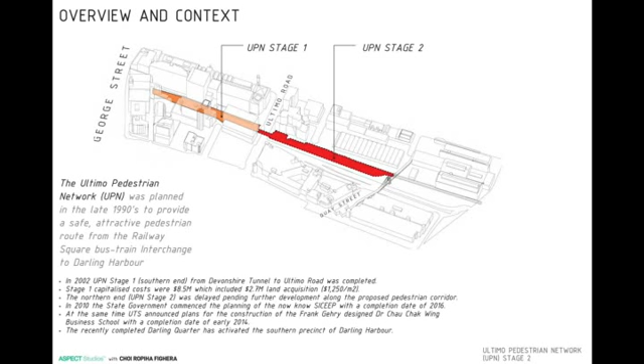It talks about what the UPN, the site we're dealing with, is actually called - that's UPN Stage 2 on that diagram. This 500 metre long by roughly 20 metre wide site should be considered in its totality, but in terms of our brief, in terms of aspect, we are looking at the darker red UPN Stage 2 in there.

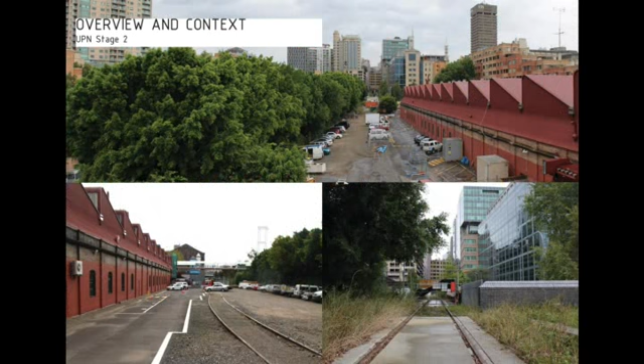The site as it is, you know that, I guess we can flick through. This is Stage 1 we're looking at here. And Stage 2, which is really the focus of our commission.

But of course it has to be a pedestrian and cycle network coming through there, connecting ideally central all the way through to Darling Harbour in an intuitive, easy way to move through. It has to be a destination with a series of events or experiences along its length. Sustainability is critical, with opportunities for educational and recreational interaction with cultures like this.

SIT and UTS are key stakeholders in this, along with the powerhouse. So what's SIT - sorry, the TAFE. So combined, your population day to day has been given to us at about 80,000. So that's a big catchment of people right on the doorstep of the UPN.

Other things there - obviously safe and friendly, and there's some commercial element to it. Our brief talked about the opportunity for a small retail opportunity on the UPN, more like the project that was just presented to you, the greenhouse. Accessibility is fundamental - this has to be DDA compliant. And innovation, of course, and history, and the way we interpret that has to underpin what we do.

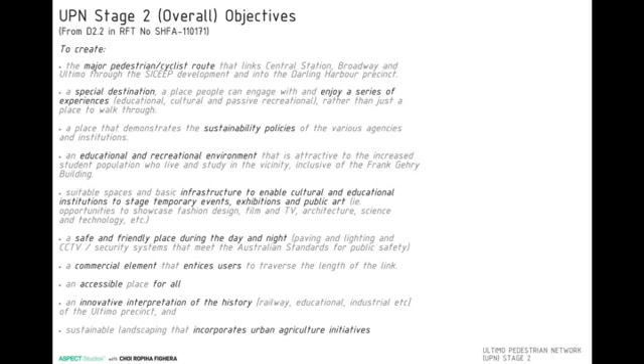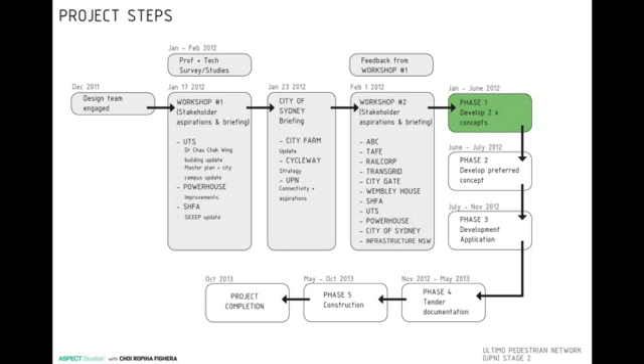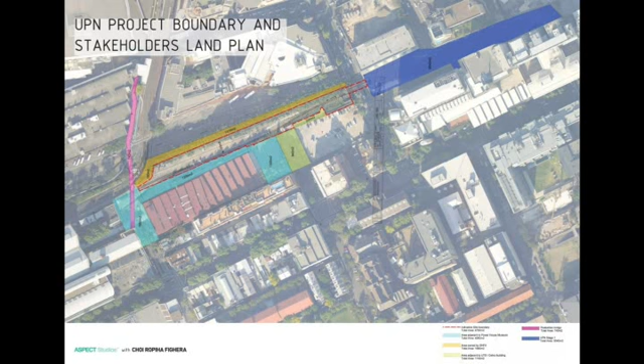So the site, this puts it in context a little bit more. You've got the model out there and should know it pretty well by now, but SICEEP, the big 20-hectare site you've just been hearing about, is a fundamental urban renewal project for the city, but also for our site. It's the northern termination of the UPN as it is at the moment. The other key buildings are the Powerhouse and the Harwood building, where 97% of its exhibition content is in the basement of that building.

Only 3% of that is ever shown at one time. The Chau Chak Wing building will fundamentally bring the eyes of the world to this part, in a way we hope this will do too, but this one's already in train. There's new development planned on top of the Transgrid building, commercial buildings, some retail down the bottom, Citygate Hotel, some ideas, and obviously these should be explored thoroughly about how that could interact on the ground plane to the UPN. And of course UTS buildings, SIT, TAFE owns this building down through here, Wembley House, ABC. So it's an incredibly potent mix.

I'll just add a few more things. If you look at this, one of the quite telling things is the intensity of cultural, education and technology institutions that face onto UPN. It's quite rare for a city to have all of these institutions essentially share a public realm, potentially share a public realm. The other interesting thing is unlike, let's say, the High Line or a lot of other rail corridors, where there might be a lot more mix between residential and general office, there's actually quite a dominance of institutions that have a relationship to UPN directly.

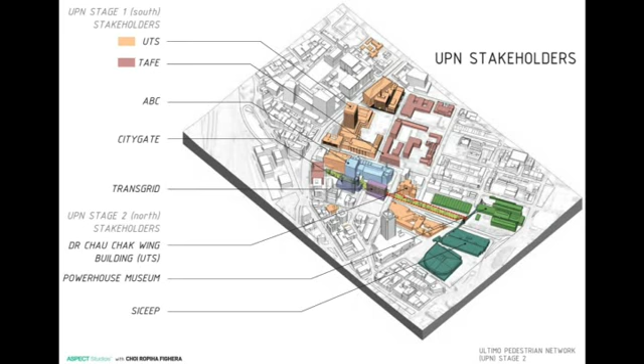That's why the studio is really exciting for us. One of the things that when we started on the project wasn't so much, well, let's make a beautiful doormat for Gehry's building, was really this more broader regional role that this corridor can have, and that's the exciting thing about this studio.

So how are we approaching it? I think the next 10 or so slides talk about our key principles that we established in order to get into the site and try to understand how we might approach it.

The first one, like any first approach to an urban design brief, is connectivity. In particular, this one's been set up in brief to us about connecting A to B, and we think there's a greater potential for multiple connections to be made across this site.

The primary one is north-south, which comes from the Devonshire Tunnel down to Darling Harbour, but there's a whole range of more interesting, and even more valuable connections east-west, such as the movement from this campus and UTS back down into Chinatown and back down into Darling Harbour.

And it's no coincidence then that all of these cultural institutions line Harris Street, being one of these great ridge streets. But what happens then is the topography falls away dramatically down into the valley floor, which is Darling Harbour, and then shoots out into the harbour itself.

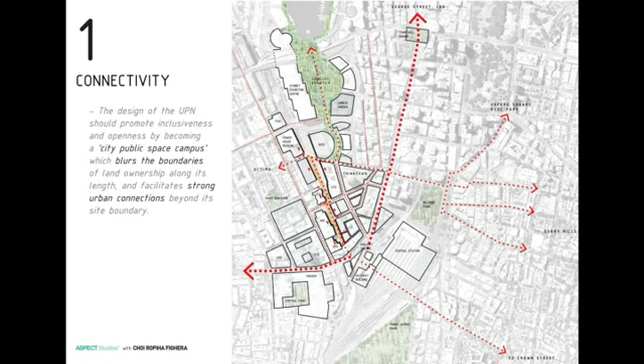Okay, so one of the first things we wanted to explore here was what is the history of the site, and how can we leverage that and create a narrative, if you like, or a story for everything that we're doing on the site.

And that's really recognising the industrial history of the site, its development from rail and wheat and wealth to city making, essentially, to something which is now about innovation and ideas. And again, the institutions which sit along the edge of this spine are those which deal with a knowledge economy rather than a former industrial economy, which was about city building and steel.

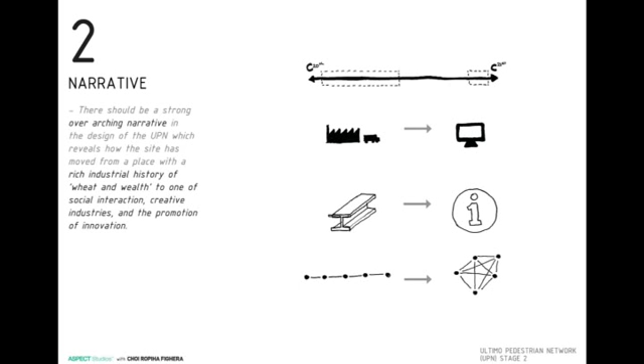So if we go to the next slide. And our opportunity, and the thing that we find interesting here, is how do we interpret that change in what we do on the ground, in this figure, in this site.

You jump in if you want to. Yeah, I'll just say a little bit more about that. When we started to talk to all the different stakeholders, what was interesting was that all the key institutions, such as UTS and Powerhouse, all have a background from their era of industrial economy. And they've all made a transition into the knowledge and creative economy. And even TAFE were very keen to tell us they don't just do trade apprenticeships anymore.

We do fashion design, graphic design, digital fabrication - we're very much part of the new economy. The corridor has had a really strong infrastructural role in our economy and culture in the past, and it still does, but it's really already evolved from that industrial role to a new kind of social and creative role.

So while the rail is of great interest to us as a story of its past, and it's still meaningful, we're really seeing the opportunity for social infrastructure to be the most dominant thing on the corridor.

What that means is, for us, it's critically important that this thing reads - what the UPN becomes is a figure in its own right. So an identity is a ground-plane intervention. It's not just about the soft programming that sits on top, but also about the architecture and design of this thing.

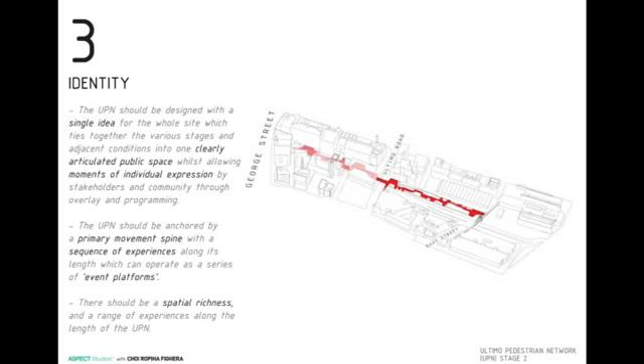Movement - this diagram just says there's a lot of back doors on the UPN right now. Our principal opportunity here is to turn those into front doors. The Chau Chak Wing building will be one of those.

It has two entrances - one on Mary Ann Street, probably the primary address for the building. But in terms of daily movement patterns, it's this high-level connection across the Heritage Bridge that will get the most movement, given its ease of access from the rest of the campus down through this building onto the UPN. There's only one connection really well used at the moment, the ABC, which you guys probably use maybe daily - that's a great hybrid connection, essentially just one little door providing the main conduit on ground to Harris Street.

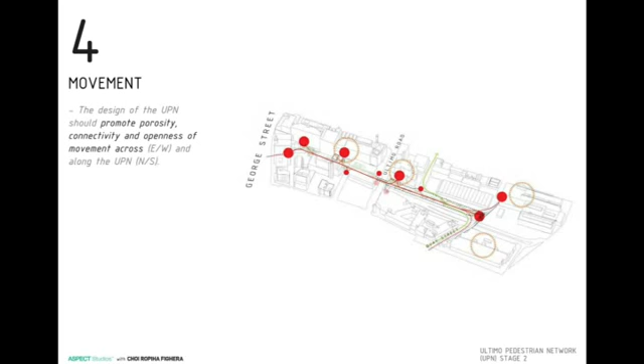Event platforms - as mentioned, that's a key part of the project. It was really interesting hearing the SHFA presentation before. The institutions we had communication with - the replicating story amongst all of them is they want to break out of their silos and engage, collaborate with other institutions, and engage with the city in a public way if possible.

So we really saw the UPN as a great platform to have those sort of interactions take place. We've established in our thinking that it's essentially not only a movement path, but an opportunity for various different kinds of social engagement to occur along its length.

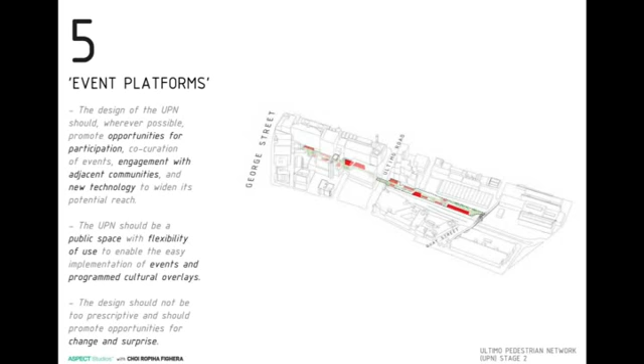So these are some overlay things that could happen on those activities, on the platform things. And interpretation is fundamental to the concept, not a tack-on idea. As we explained, the basis of the whole drive and design is trying to tell that narrative of transformation, but still retaining a kind of infrastructure role. It's just the kind of infrastructure that's evolved.

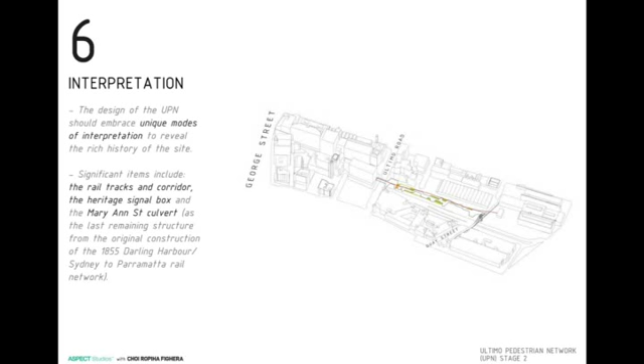And secondly, as Sash said, that's told by the new figure that overlays onto it. So even as we conceive how that might work on UPN stage 1, where you have the asphalt etc, we almost conceive you could break up that asphalt, leave it as it is, let some of the ecology rehabitate into that, and then these new social infrastructure overlay on that.

So there are some traditional interpretive things we see there's opportunity for. There's retention of as much of the original heritage fabric as possible, including the rail lines. There's a culvert there, a heritage signal box, and other items along the corridor. There isn't a lot, but there's some beautiful industrial fabric that faces onto it. So combined, we're looking to retain that as well as the remnant ecology that's there.

So the landscape ideas aren't so much about a very formal introduction. It's really about re-curating the industrial ecology that's there at the moment.

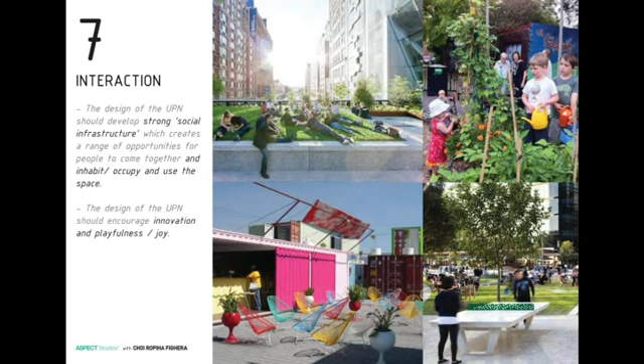So it might not be 9 to 5, but it might be more evenings and weekends that the local communities can engage with the site. So, yeah.

So to facilitate some of the events, we saw an opportunity to have a permanent infrastructure that facilitates that, and for want of a better word, we call it space transformers. Rather than a traditional function room, we're looking at more innovative precedents that blur the realm between pop-up events, permanent infrastructure, public realm and internal space, things such as the storefront and Guggenheim BMW lab, which will be presented next.

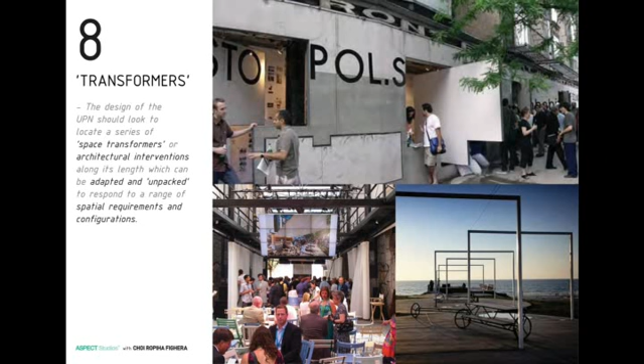The material overlay, so you can get a feel for some of the things that inspired us. We'll just go on to show you.

I think just quickly on that, one of the things we're interested in is repurposing the materials which are there, not trying to bring an overlay of precious materials onto this thing which has a terrain vague quality to it. The garden elements John mentioned before, we talked about them as being Derek Jarman gardens, which many of you know his work, but you can look it up and see what we're thinking about.

But using the materials of this site to create garden spaces, which maybe on the bottom right you can see the delicacy in the very fine grain, the detail of it, which is there. But also there's a robustness to the concrete and the ballast and all of these materials which we want to use.

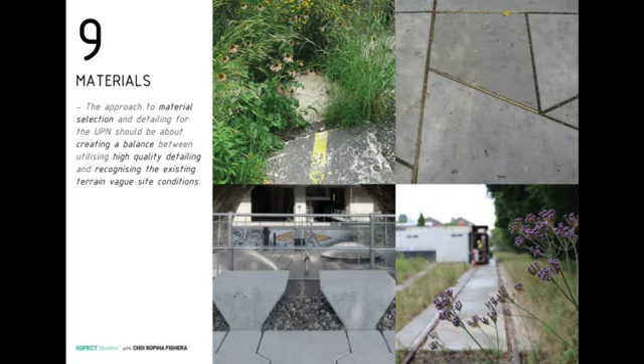Sustainability - other than general best practice, such as water sensitive urban design, using low energy fittings, etc. One of the innovations we're trying to do is prefabricate as much of this public domain as possible.

This figure element is a precast concrete panel, and we like that idea for multiple reasons. One, it repurposes what's had a history as a very pragmatic, traditional warehouse tilt-up panel, to have a different role here as a ground plane, but also tuned so it's one piece doing the structure, the seating, the edging, and the pavement. The other thing that's critical, because the time frame for this project is really tight, is that it will help facilitate the pace of installation for the project.

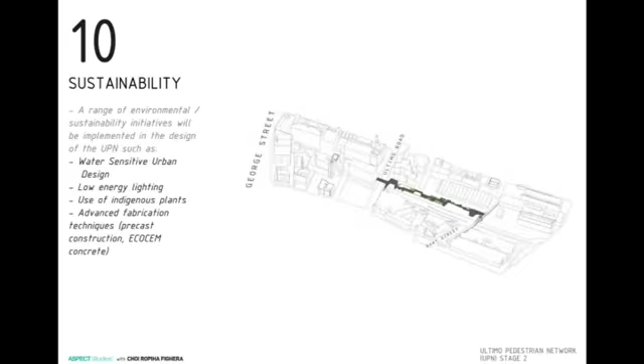So you can see the dynamic between the two materialities we have in mind. We have a couple of options, but you'll probably only present the first one.

As part of our brief, we've had to come up with two options, mainly driven by cost. One is premium and one is the everyday, business-as-usual model. That business-as-usual model might be an extension of what's already there as part of UPN Stage 1 - rolling that out. It works - you can get from A to B, ride a bike down it, walk down it. It may be pretty unsafe at the moment, but it's still a connector. So the base option would have been that.

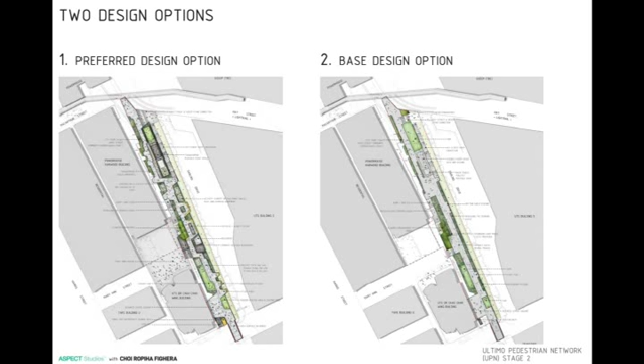So what we're going to do is take you through from south to north. Just for communication purposes, we've broken it down into three parts: one is the Business School Square, as we call it; two, Mary Ann Square at the end of Mary Ann Street; and three, the Transformer.

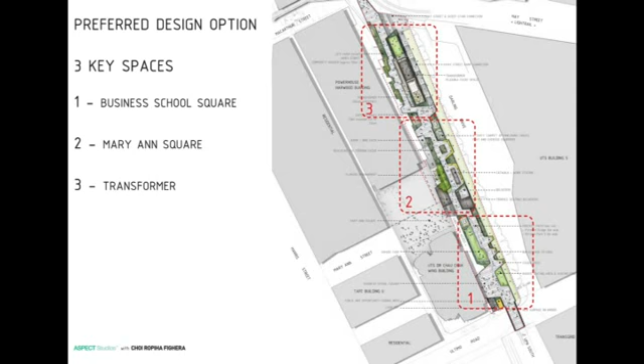The Business School Square is really the new forecourt entry into the business school. Just to give you an idea about levels here - I'm sure you've built the model and know the levels - we're sitting at about RL 9.5 at the bridge, and the street below is about RL 4, so there's at least 5 metres of elevation at that point.

The bridge is a heritage item - it'll be structurally remade but retained on site. What happens is we're looking for as many opportunities as possible to get up to this level. So we're proposing, near a bit of Transgrid land here, a stair connection back up directly into the Chau Chak Wing building. This will be one plane which comes along and then slightly elevates to the glazing line through here, and ideally the materials might extend even into the building.

There's an opportunity in the future to connect into the UTS library connection there - over to building 5, over Darling Drive. One of the major things you'll see on the site, which we've retained, of course, is the fig trees.

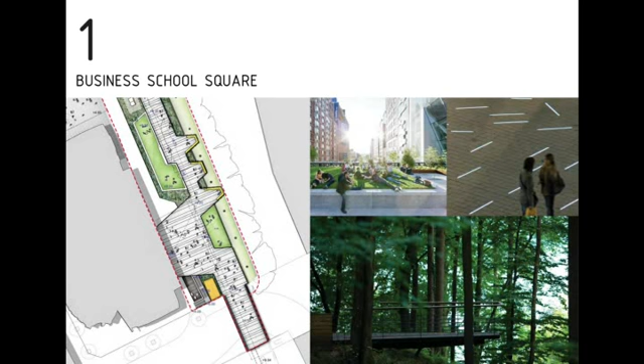The volume of those, if that was a building on the site, would be the largest building by far. They have an incredible presence on the site, and we think we need to work with that and retain those. What we've got here is some elevated turf areas where the precast pavement shifts up.

It becomes almost like a little chill-out space at the beginning of the building down through here. Further to that, these precast panels shift and stretch over the retaining wall, which drops away 4 to 5 metres down to Darling Drive, and becomes a series of study pods which are cantilevered out underneath the canopy of the trees, like this image here. They'll be wireless spaces which can be used for study and just retreat amongst the canopy of the trees.

The whole corridor, we hope, will be a free Wi-Fi zone. This is one of the things we've noticed can really activate and change the dynamic of the space too.

So the view, looking down from here, past the Harwood building, this little rebate of land which comes down here is the access that Transgrid needs to get into their substations down through here. The forecourt offers some opportunity to craft large, generous furniture at the entry, and the plans are for a little cafe to spill out down through here.

These pods, which you can see underneath here, are amongst the retained trees. We're looking north, but one of the great things this site offers is relatively low buildings on the west, nothing on the north, and so an incredible solar aspect here. So the simple things about sitting in sun on turf under a tree - they're not hard to deliver, but are of kind of unquantifiable importance, I think, day to day.

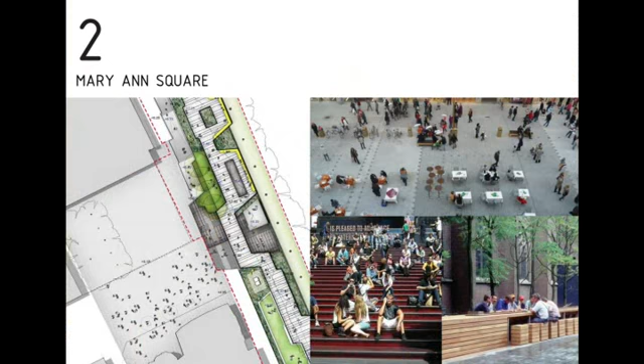Mary Ann Square is probably where we've extended our remit a little bit. When we first looked at this, we saw a great opportunity for this incredible new building where it hits the ground, and asked what the opportunities were for that to extend north. Down low where Mary Ann Street comes down, there's a level change, about 3 metres different, so it's probably about 5 to 8 up here.

That's about the level change we're dealing with, and we saw a great opportunity to make something of that change, in the same way the ticket booth does, in terms of creating social infrastructure - taking up that grade change with seat steps and stairs, and beyond that creating another level of seating under the canopy of the trees.

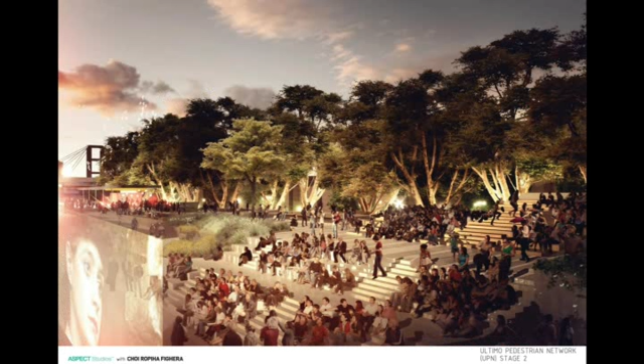What that does is set up a prospect back down to an opportunity to create a new public space for Sydney down here. Between the Powerhouse and Chau Chak Wing, connecting these two things should be a fantastic public space which gets great light, similar in scale to Customs House. It would be paved, could be bollarded, a very simple space giving opportunities, which I think you'll see in the next image, for occupation of that grade change at its edge.

Did you want to jump in? Oh yeah, look, I just wanted to say one of the things that really compelled us about that idea was...

The corridor itself is only 25 metres wide, so we can facilitate small to medium scale gatherings, but anything at the larger city scale, the corridor really can't sustain - which I think is a good thing too, because we have a lot of great institutions like the Powerhouse, and this is an open public space opportunity between the Powerhouse building and UTS. We just thought, well, that's got to be it, you've got to put it there.

So, this might be one of your conversation points about the city. But if we just go back quickly - sorry Tasha, just one. Yeah, sorry, yep, this is not our site.

We've sort of extended our brief down through here, and we did pitch this in the most optimistic way to the Powerhouse, about making the square go from building to building. Of course, we think that's a great opportunity. There's a master planning process which Powerhouse are yet to go through, so we've taken all of our proposals outside of that boundary and put them here. So it's still powerful, still good, but we'll see what happens in this space.

Peter Morton's sitting up the back - he's from the Powerhouse, he's going to speak to us a little bit later. He'll still have something to say about that. Okay, next.

I guess what you can see in this image as well is leading north - we'll talk about that next - to the transformer up through here. But I think you can start to see how level changes facilitate opportunities rather than just limits to access and movement.

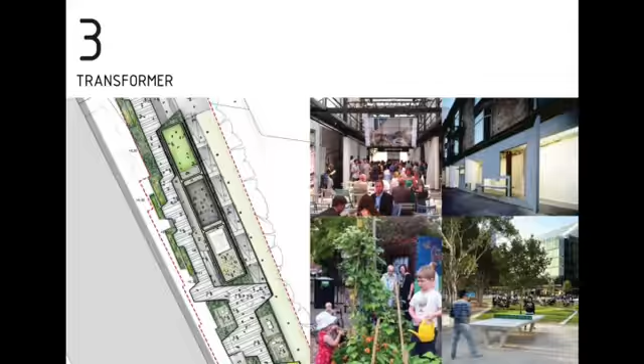This project will be open before that's activated. So past the Gehry building, there's currently less incentive to go further north into this area. There's not a natural movement pattern, other than if you're wanting to go to Darling Drive.

We really wanted to put something there that will invite people to come down and use this. We're hoping the intensity of activity that might occur in the Gehry building might precipitate a desire to get away and have a calm moment further on the north end of it. It also sits at the cross-axis between the ramps and disabled access ramps occurring to the left and down to the right of it.

The whole transformer structure is essentially a roof frame and a utility object. It also sits on a platform that's raised, giving you a sense of coming up for that prospect, with soft landscape around it. So, as you can see, it's very simple.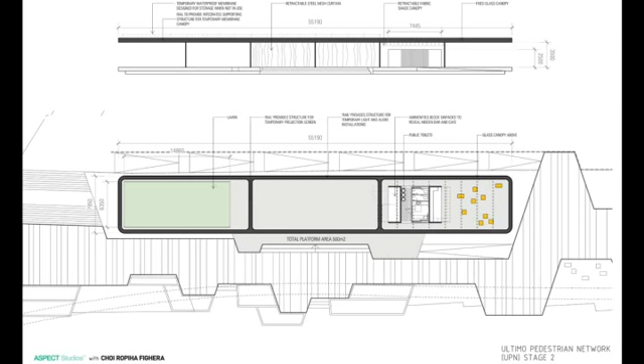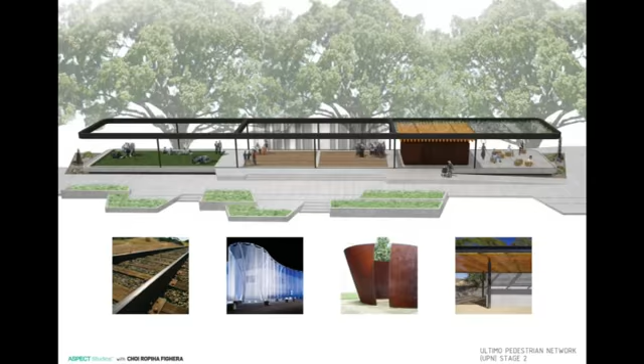The rail structure is an infrastructure that will hold a range of things that allows it to adapt. It will hold general lighting, power, data, AV, but in terms of how the space can be transformed, there'll also be retractable shade elements and roof elements, as well as a metal mesh that goes around. And it's divided into three zones, which gives a range of flexibility in how much you might be able to use it.

So in our brief, where the project's at is we have sign-off on this design as a general concept, or broad concept, if you like. The original brief was really just for a simple toilet block and a kiosk for the project, and we felt that the UPN corridor, with the ambitions latent in the brief, plus what we saw as an opportunity, could have something larger than that.

So that was kind of like the beefed-up version of the kiosk and toilet. But if they spend some extra money on the overlay components that allow it to change—this was just trying to show you—it may appear the same, but the overlay components can radically change the different ways they could operate. So this could be a small outdoor lecture set up here.

This could be a small party with a back-of-house area. This could be a very formal structured event where you spatially enclose the whole mesh, and at night time, particularly with the mesh and lighting, that can completely change the reading of what that space provides—with a big dining setup and a full kitchen that might be able to be set up in the back of house, for the varying different modes there.

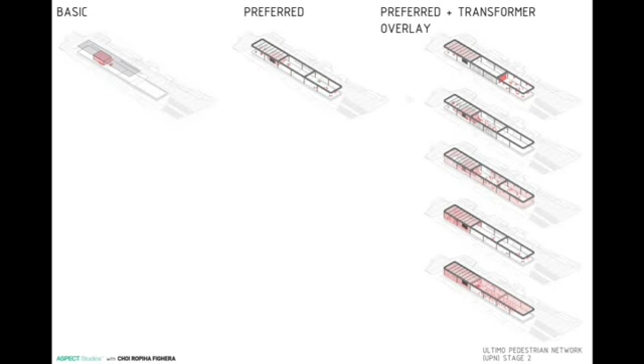Next. Okay, we might flick through this—if you want to go to the very end, Tasha, if you can just keep going. We don't want to talk about this. We probably do want to talk about that one.

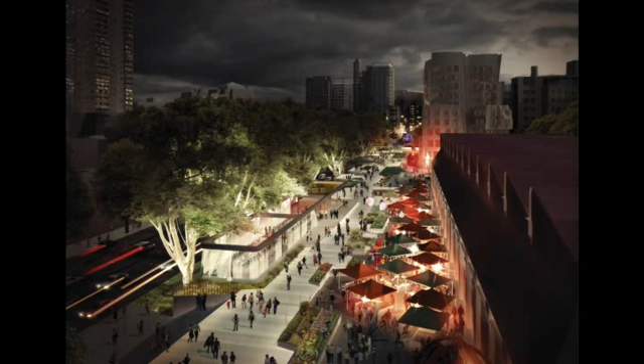This might be our final slide, which is a view looking south, back to the Devonshire Tunnel at the very end, past the Harwood, past the Chau Chak Wing Building. And I guess one of the most interesting things for us is, yes, the project is an incredible opportunity to do something which has longevity, is enduring, and is uplifting as a space, but it's also the other things which will happen after we leave the room—the curation of it, the placemaking of this. Those are the real opportunities which I think are going to bring sustained life to this place.

And this image talks about what we're in control of, what we can control, I suppose, as part of our brief. And these markets, these night markets, which might be the young blood markets, which spill out onto the UPN—we're trying to elicit opportunities to come, speculation. So that's really your role now to take that up.

This is what we can deal with down through here, and we can provide spaces where these things can happen over time. But the most interesting things will happen when all of these institutions come together in a kind of governance model which allows for events, happenings, radical things that we can't plan for as part of our scope, but we can leave space for. So that's really what this image seeks to leave you with, I think.

Yeah, that's it. Thank you so much.

They're such incredibly evocative images, aren't they? They're so seductive.